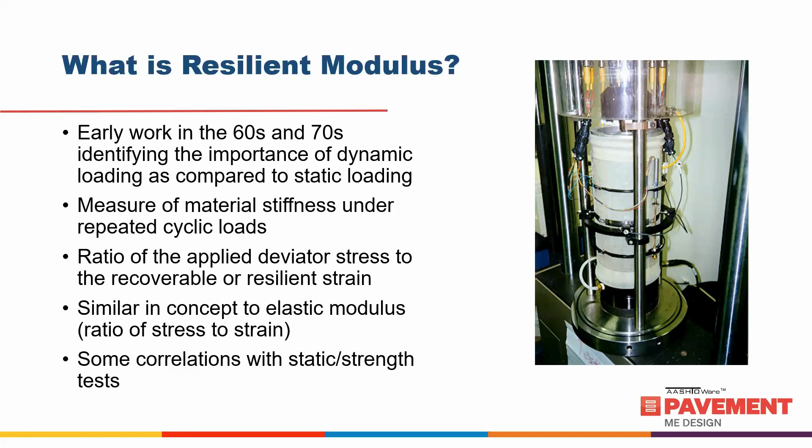I'm not going to go into a lot of detail on that, but resilient modulus testing typically involves a load cell, like I showed in the previous image that you see on the right. There are different sets of apparatus that you can use for this, but this is one example. You apply a load on, you confine your specimen with a confining stress, and then you apply a deviator load.

Typically, the deviator load is a pulse type load, and you load it for a certain duration, a tenth of a second for example, and then you have a rest period. The rest period has changed over time, and different standards call for different rest periods, but you may typically see 9/10 of a second of rest period following that.

So if you repeat this over time, your material, your sample or specimen that you're testing, will have a certain level of strain, and then you remove the load, and some of that is recovered, and then you repeat it. You have a behavior that looks something like this on this chart.

The resilient modulus then is just the recoverable part, and you see that in the case of this soil, there may be a plastic part that essentially gets accumulated over time. But the resilient modulus is this recoverable part, the ratio of this recoverable part to the stress that is applied, that is the deviator stress, the load stress that you're applying. So that's the definition of a resilient modulus.

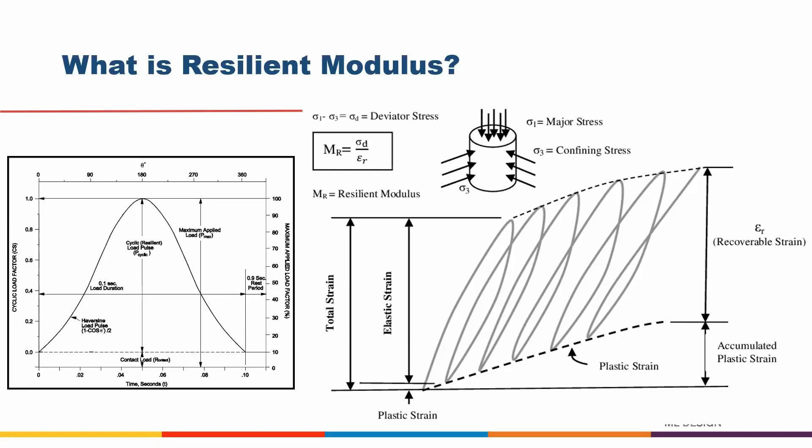As you can see, it is pretty specific, measuring a specific property of that soil under some specific testing conditions. So we always have to keep in mind that there is a testing standard that goes with that, and the testing standard would determine some of the values that you might get.

Why is it so important for us pavement engineers? As early as the 60s, researchers found, and definitely a lot of work was done by pavement engineers in the 70s, that it was a key property for unbound material and a key input for pavement design.

The reason for that is the dynamic aspect of the loading, and the way you can actually simulate field conditions, adding a load and removing a load, better approximates what might happen in the field. Obviously, there's no one way to exactly model what is happening in the field, but we want to characterize a material that, to the best of our ability, can better come close to how it might perform in the field.

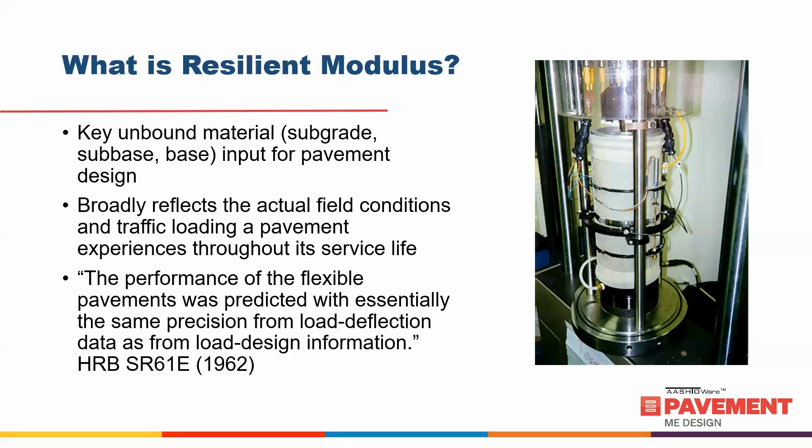I pulled this quote from the AASHTO road test report, the HRB SR State of the Art 61E report from 1962. One interesting thing in this quote was that the performance of flexible pavements was predicted with essentially the same precision from load deflection as from load design information. So very early on, engineers realized that the deflection of a pavement is a good measure of the performance of the pavement, and that's why deflections and the measure of deflection become important in pavement design.

As I mentioned before, resilient modulus is a specific input collected at a specific set of conditions, and there have been standards developed over time. The first standard, the earliest AASHTO standard, was T-274, from 1982. Since then there have been a few other standards, and the most common one we see now is AASHTO T-307, first published in 1999.

The main difference between many of these standards was that in the beginning, in the early 80s and the 70s, resilient modulus testing had some challenges with reproducing results and with the consistency of getting test values. Over time, a lot of research was done on this test, and it became better in terms of specimen preparation, testing protocols, how to measure the deformations, where you measure it, and the stress levels that you use.

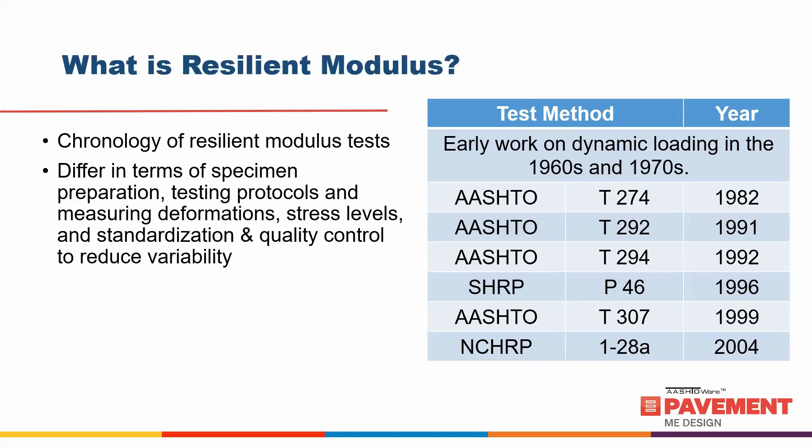So what are some key factors that affect resilient modulus?

I bolded the first two items because they are material related. You may have a certain type of soil or aggregate, coarse or fine, and the type of material and how it behaves under a repeated load is a factor that affects resilient modulus. If you do something to that material, like adding stabilization agents such as cement or lime, that affects the resilient modulus as well. But those are some intrinsic parameters.

But there are some extrinsic parameters that affect resilient modulus as well, and the extrinsic parameters include the stress. Resilient modulus is dependent on the stress level that the sample or soil feels at the time of the test or in field conditions. So what is the stress that it is undergoing?

It changes based on the applied deviator and confining pressures. Resilient modulus is highly sensitive to moisture and density, and those are properties that can change over time depending on how you prepare the specimen. So that impacts resilient modulus.

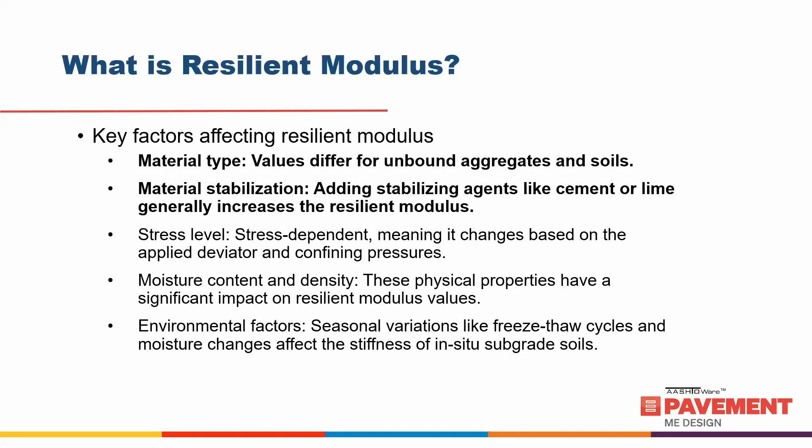And finally, environmental factors. If you have seasonal variations, frozen soil, freeze-thaw cycles, moisture changes - that is the previous bullet - all affect the resilient modulus, particularly of subgrade soil.

Here are some examples of resilient modulus. Some of this I will come back to, but just to give you some idea of how much the resilient modulus changes. On the left is a high plastic clay, and if you look at each one of these, there are three kind of related lines here.

Each one of these is at a different deviator stress that is applied, and as you go from one point to another, each one of these is at a different confining pressure that is applied. As you go from one point to another, you're applying a different load stress to it. So you can see the confining pressure and the deviator stress impacts the resilient modulus.

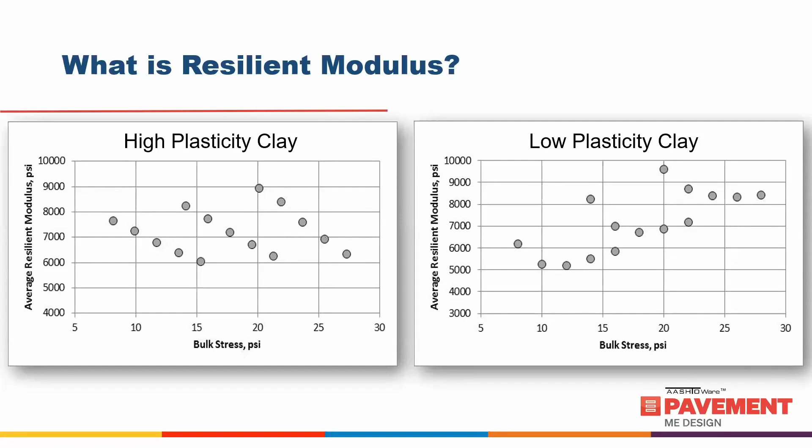In this case, it can be as high as 9,000 and as low as 6,000 for this high plastic clay. For a low plastic clay, it can go from close to 10,000 to 5,000. So there's about 2 to 3 times a factor of difference in terms of resilient modulus in these two examples.

For coarse grain soils and aggregate, you can see in this case the coarse grain soil is somewhat similar to the last slide we saw, and there's a stress-dependent behavior here. That means depending on the stress, you're going to have a different resilient modulus value.

To the right, you can see this aggregate base. It can go from 10,000 up to 45,000, depending. You may not reach as high as 105 bulk stress, but let's say you go to the 65 range, you're still going from 10,000 to about 30,000 in terms of the resilient modulus of that aggregate base.

So the take-home message is resilient modulus is really not one value. It's actually dependent on many different things. If you think about how a pavement structure is, you have the structure where the subgrade soil or base layer is sitting, and you have a load that's applied, so the stresses change because of that load. You're not having one value of resilient modulus technically - you're having many different potential values.

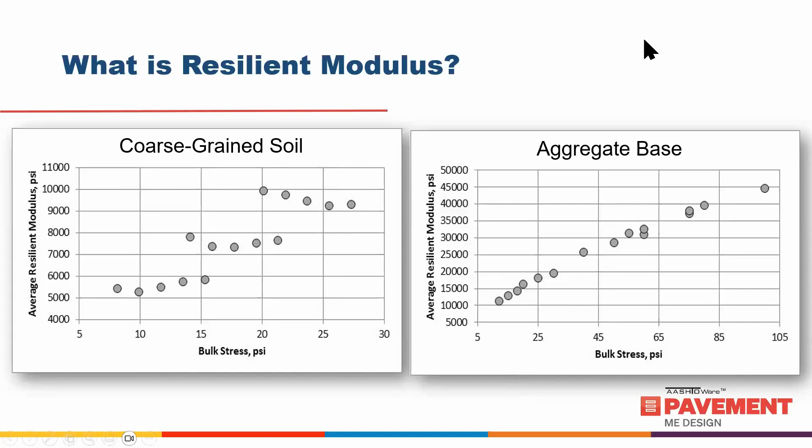So that gives you some background on resilient modulus and testing. I didn't want to go into too much detail on that. There's a lot of people who have done a lot of good, important work in resilient modulus testing and how it impacts performance and so on.

But let me come to what resilient modulus meant for AASHTO 93. If you recall AASHTO 93, the equation, the fundamental equation for AASHTO 93 really came from the AASHTO road test, which was in 1958 to 1960. At the road test, which was done in Ottawa, Illinois, there was one soil type.

That soil type, let me come back to that. The original AASHTO equation, really from the 1966 version, is just this number, 9.36 times log, blah blah blah, until this log number. So this part was the original AASHTO equation.

In 1986, with the 1986 guide, in the 72 guide they added some regional factors, soil factors. But the 1986 guide was the first time resilient modulus came about in the AASHTO road test, in the AASHTO guide. That's this last two terms, the 2.32 times log resilient modulus minus 8.07. And then in the 93 guide, in the 86 guide, they also added this reliability portion, that's the first two terms.

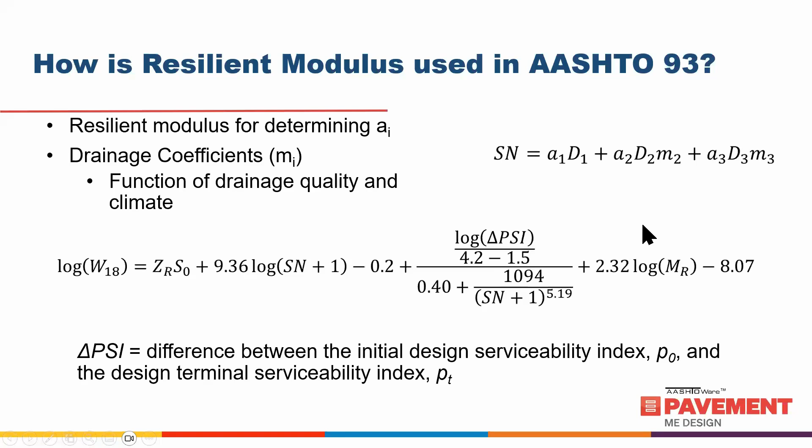I want to talk a little bit about sensitivity, just this one slide. If you use the AASHTO equation, and for example, let's say you are off in the computation of the resilient modulus and you use a 10,000 resilient modulus versus a 15,000 resilient modulus...

So between 10,000 and 15,000, it's about half a structural number. I'd say that's equivalent to about one, maybe a little more than 1 inch of asphalt. And then between 10,000 and 20,000, it's about a structural number of maybe about 1 or so. So again, that's about 2 inches of asphalt.

So if you're off by 2 or 3,000 in resilient modulus, you could be off by about half an inch of asphalt in your model for computing the structural number and then the thickness of asphalt that's required. Keep that in mind, because I'm going to talk about this when we look at the PMED sensitivity as well.

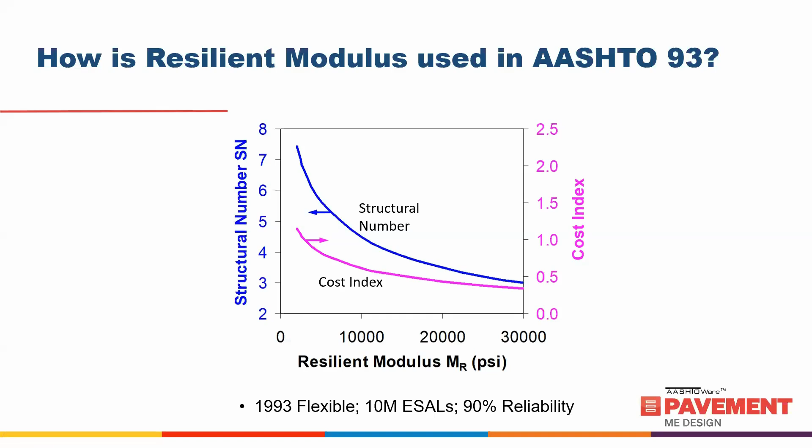So how is resilient modulus used in the AASHTO 93 guide? It's only used for flexible pavements. Starting with the 86 guide, the AASHO Road Test resilient modulus was 3000 psi.

AASHTO, and clearly at that time they used that model that was used in the 86 guide, which was the AASHTO T274 test. I'm presuming it's the average in situ estimated value, the 3000 psi.

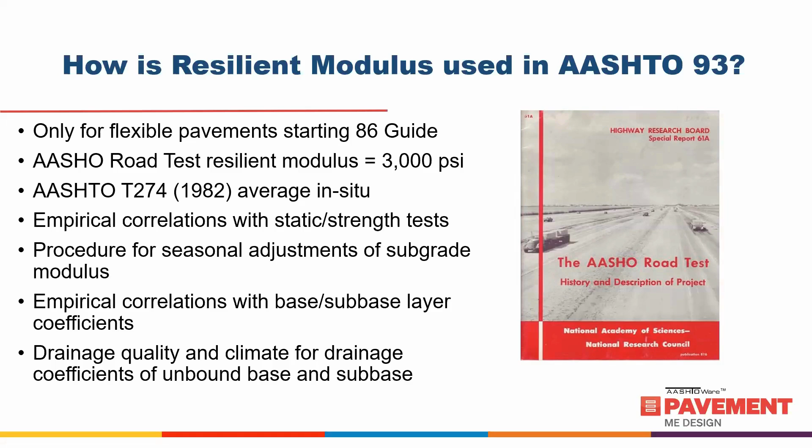The AASHTO guide also provided a lot of empirical correlations with static and strength tests. As I mentioned earlier, there's a procedure for seasonal adjustment of subgrade modulus, some empirical correlations with base and sub-base layer coefficients, and then drainage quality and climate drainage coefficients are used for the unbound base and subbase to account for moisture in those layers.

Just one last slide on the 93 guide before we move on to Pavement ME Design. The 93 guide had some quotes like: resilient modulus should normally be based on the properties of the compacted layer. So they understood that in situ compaction was important. It's based on average resilient modulus values, and it emphasized that you should not select a design resilient modulus value based on some minimum or conservative criteria—use an average value.

There is some mention of stress states in the AASHTO 93 guide, but not a whole lot, and I don't think there was any kind of adjustment made for stress states in the AASHTO 93 guide. In fact, I'm guessing most agencies and most designers probably use the same resilient modulus values regardless of whether they're building a thin or thick pavement, whether the structure above the subgrade is substantial or not. There was some understanding that stress states impact resilient modulus, but most agencies probably did not adjust the resilient modulus depending on the stress state.

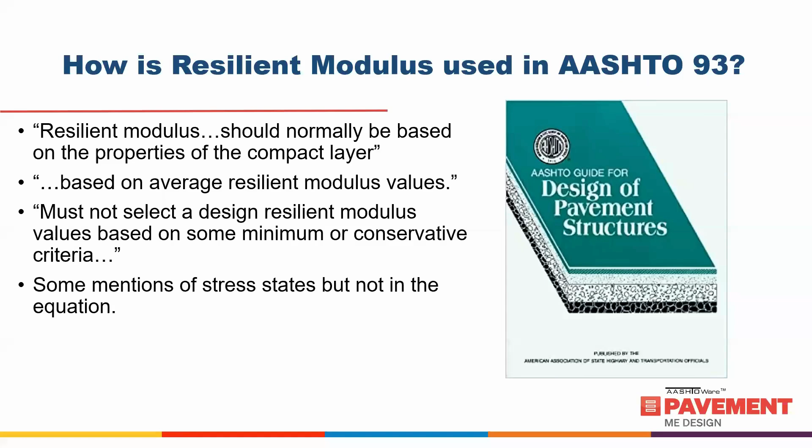I'm mentioning some of these now because as we talk about PMED, you start understanding some of the differences and what we can do with Pavement ME Design going forward. So for the next 15-20 minutes or so, I'll talk about how resilient modulus is used in Pavement ME Design.

If you look at resilient modulus input in Pavement ME Design, it allows you to select level 2 or level 3—there's no option to select level 1 for resilient modulus. You have two options: one is to let the software modify the resilient modulus based on the temperature and moisture in the pavement layers, and the other is for a user to enter some annual representative value to use as the resilient modulus.

In level 2, the idea is you can use correlations of the material you're going to have on the project. You would do some lab testing on the soil for that project and use correlations with CBR or R-value, and the software has some correlational equations in there that you can use as your resilient modulus. This is for the soil, base, or subbase that you might encounter or use on that project.

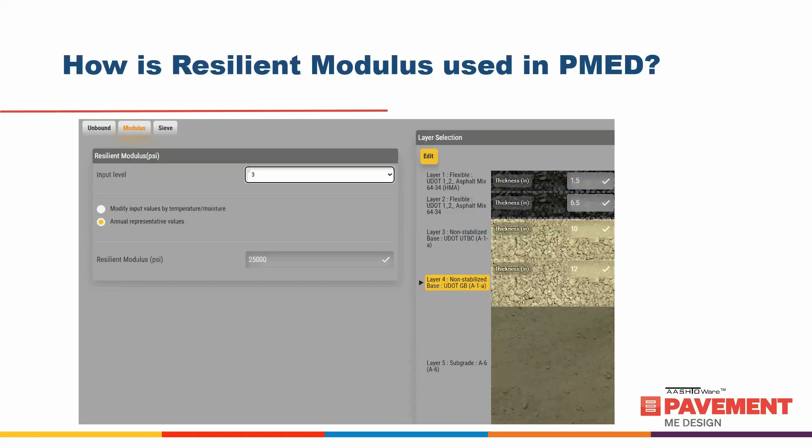At level 3, you would essentially just use some default value—a regional default value, a state default value, or maybe even the PMED-provided default value for the resilient modulus. So that's how the software is currently set up.

This slide summarizes that there is no level 1 right now in Pavement ME Design, because the original MEPDG models suggested that level 1 really should be a nonlinear stress-dependent resilient modulus parameter—K1, K2, K3—and it also requires the use of nonlinear finite element code, which is not currently in Pavement ME Design. Ideally, if you really want to characterize unbound materials, you need to do a nonlinear stress-dependent analysis of those materials and model that appropriately.

So level 2 and level 3, where you specify the resilient modulus directly, through empirical relationships with other index properties, or use a default value, has no stress dependence—it's essentially an individual value. I put a question mark on 'no stress dependence' because as we go forward, I'm going to talk about how you can bring in some level of stress dependence into the model.

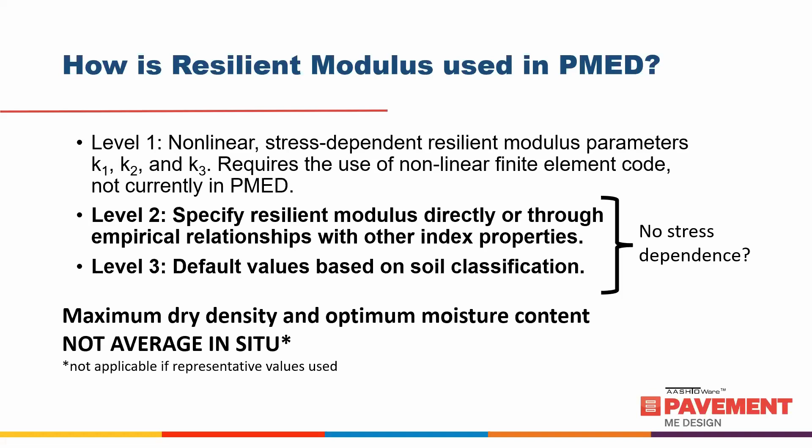I'll explain some of that in the next few slides. So essentially, if you go back to some soils engineering classes, when you take a soil and compact it at the optimum moisture content, that's where you can achieve the maximum dry density for a given compactive effort. These two curves you see here are two different compactive efforts, but at a given compactive effort, you can achieve a certain peak density at that optimum moisture content.

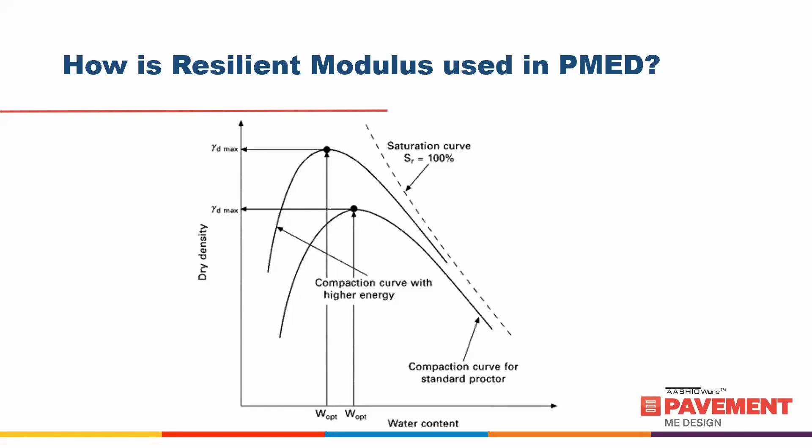The reason you enter the resilient modulus at the optimum moisture content and maximum dry density is because when you do a Pavement ME design—and I'm talking right now about new construction—you have a base construction date, a pavement construction date, and the traffic open date. The base construction date is when the moisture model starts. There's an assumption that the contractor does certain things in constructing the base, and once that base is constructed, the moisture model built into Pavement ME starts moving moisture from the groundwater table and the soil water characteristic curve through the pavement layers.

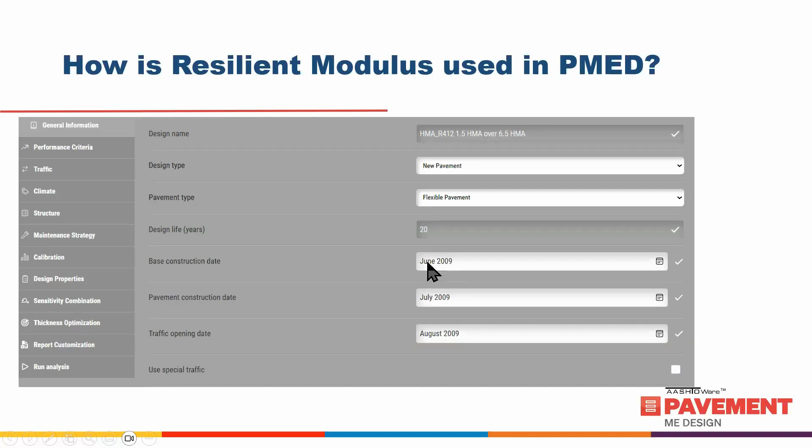So, for example, if you have a 20-year design, the design is really from August 2009 to August 2029, but the moisture model actually starts in June 2009 and then carries that on till August 2029.

So the reason when the MEPDG was developed they did not use in situ values, but rather used the optimum moisture content and maximum dry density, is there's a couple of important reasons. One is purposes of calibration, because the majority of resilient modulus tests are typically performed on specimens at optimum conditions. So for building databases and for calibration considerations, the resilient modulus at optimum conditions is used in MEPDG.

The original MEPDG documents also say that common practice is to require contractors to compact base to at least 95% of maximum dry density and subgrade to 95% of maximum dry density using the modified or standard Proctor. The thinking was that a contractor will typically target above these minimum requirements, and in order to compact to these levels, they probably want to get the moisture at the optimum moisture content to basically achieve those densities. So good construction practices will force contractors to wet the material to near optimum to facilitate compaction, meaning the base will be close to maximum dry density and optimum moisture content when constructed.

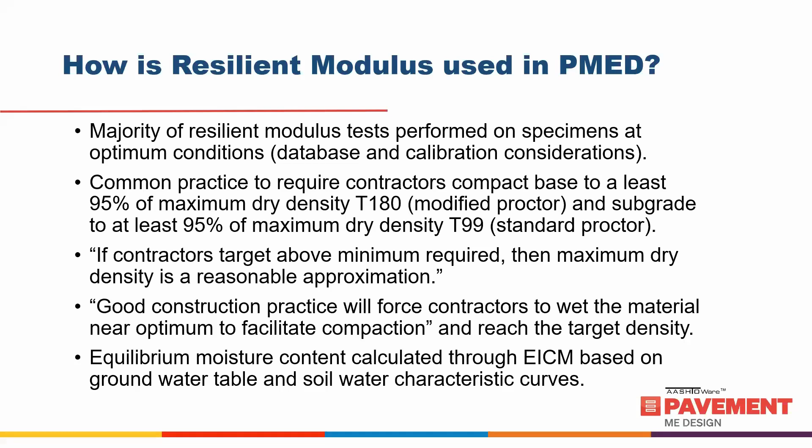So let's look at the sensitivity of resilient modulus in Pavement ME design. Here are a couple of examples. Anytime I give this kind of example, I always want to put the caveat that this is one set of data for one specific set of conditions and one set of inputs, and cannot really be generalized to a full broad range of inputs. But here are a couple of examples.

The chart on the left shows a resilient modulus range from 8 to 22. You can see the HMA thickness in this condition—around a modulus of 10, it's about 7.5, and if you go to about 20, it's about 6.5. So about a 1-inch difference in HMA thickness. More likely than not, you may be off in your resilient modulus by only maybe 2, 3, 4, 5,000 psi. If that's the case, your difference—say from 12,000 to 16,000—is maybe about a quarter of an inch, maybe a little bit more in this case.

It's often useful to do a sensitivity analysis to see whether you really need that level of sensitivity in a certain parameter. I'm not saying you do or don't, because it depends on the other inputs, but it's always valuable to do a sensitivity analysis and see how something impacts your layer thicknesses and designs.

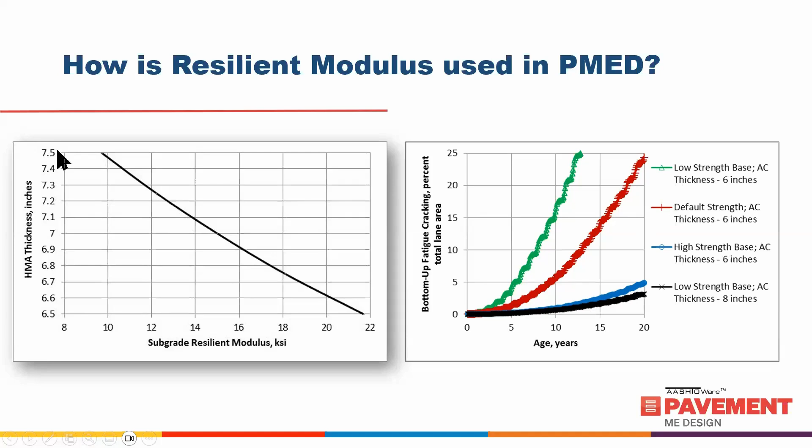But if you increase that thickness from 6 inches to 8 inches, you can see that 2-inch difference in thickness kind of made up for that base. So you could use a low strength base, which is the green line, and add 2 inches of AC and you're now at this black line. But if you keep the same thickness of AC, 6 inches, you go from the green line to the blue line if you have a high strength base versus a low strength base. So that's a different way of looking at sensitivity in terms of cracking, in terms of HMA thickness.

So let me pivot a little bit from those inputs and talk more about the stress sensitivity of resilient modulus and how we can use that in Pavement ME Design.

There's a new standard that should be out soon. It has been balloted, and this is a standard practice for determination of the design resilient modulus for unbound layers for pavement design. This gets us to a quasi level 1 resilient modulus. A true level 1 really means you have to model the stress sensitivity—you might have to do finite element modeling of the structure—but we can include a stress sensitivity in the resilient modulus value that we enter.

Resilient modulus is impacted by the test conditions—maximum dry density, moisture content. But now we're also bringing in the stress state that the soil, base, or unbound material encounters while it is in situ. So this standard gives you a way of accounting for the stress state and using a resilient modulus value based on that stress state.

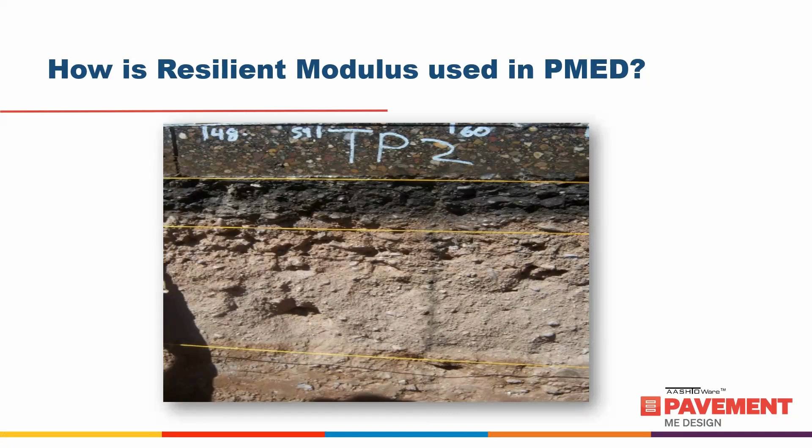So if you think about soil structure—I'm going to focus primarily on asphalt pavements, but this discussion is somewhat true even for concrete pavements—you have your asphalt layer, your base, and then your subgrade. Because of all these layers, these unbound materials are at a different stress state than if they were just loose materials, and so we have to account for this stress state.

Here's one example, from the standard itself: resilient modulus testing allows you to have a confining pressure. So if you have a confining pressure of 6 psi, 4 psi, and 2 psi, and then you add the deviator load - the load that you apply and release in a cyclic manner of 2, 4, 6, 8, and 10 psi at each of these three levels - you can combine those numbers to get a bulk stress, which is essentially 3 times the confining pressure plus the deviator stress. So 3 times 6 plus 2 is 20.

That'll give you a bulk stress, so at different bulk stress values, you have a resilient modulus value. One thing to note is that the modulus values can change depending on the confining pressure for this particular soil. As the deviator stress increases, the modulus values decrease. And as the confining pressure goes from 6 to 4 to 2, you can see that the higher the confining pressure, the higher the resilient modulus.

So this is typical behavior of a silty, clayey type soil - when you confine it, it often has higher modulus values.

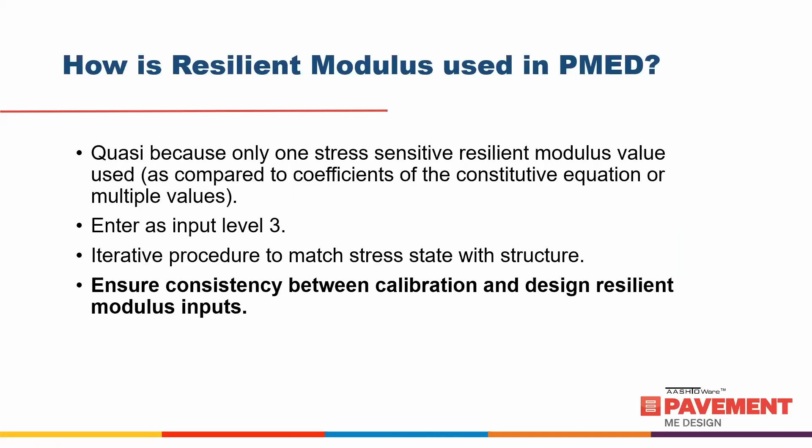So in Pavement ME design, in order to follow this standard practice that I mentioned, what you want to do is start with the laboratory testing. You test the material at different confining pressures and at different deviator stresses, and then use this data to develop a constitutive model.

Now in cases of some soils, you could have a simpler equation. For example, if you have a granular soil, you could just have K1 times theta to the power K2, and that will give you a model as well. So there are a few different functional forms that you could use.

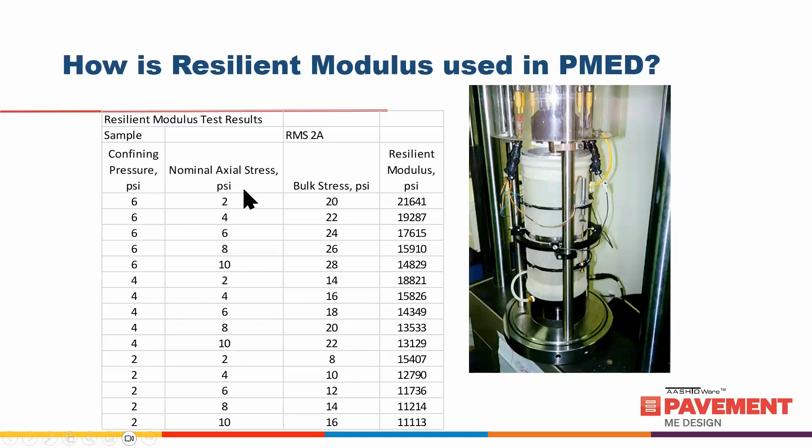So you start by developing that, and the reason becomes clearer when we get to picking the right resilient modulus values - we could potentially just eyeball it from these numbers, but we're engineers, so we don't want to just eyeball numbers. You come up with these equations based on the data you have.

Harold Von Quintus and some of his colleagues have done this work for decades, and in the late 1990s, I think 97 or 98, they published some work on back calculation and resilient modulus - how to use back calculation modulus values, and how they relate to the laboratory resilient modulus values.

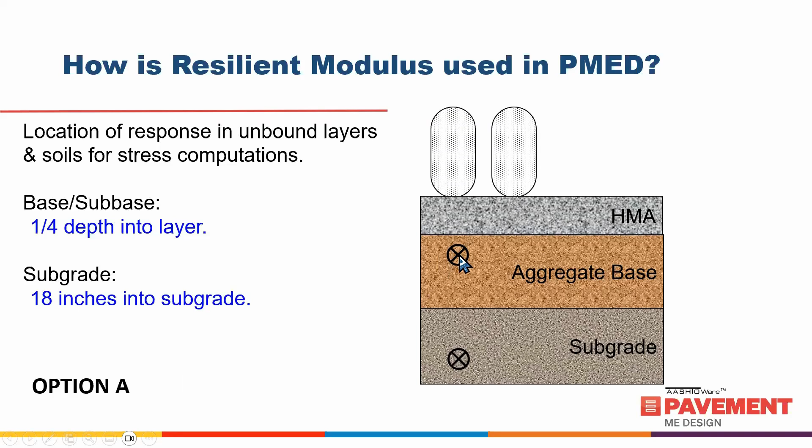Based on those reports, they came up with a location for calculating your stresses, strains and responses. For base and sub-base layers, you go to a quarter of the depth of the layer, and in the subgrade, you go 18 inches into the subgrade. I have option A here, and you'll see this in some of the coming slides because there's another slightly different way we could go about this, but I'm going to start with this option.

So this is a kind of busy chart, and I'll try to explain it the best I can. What we are trying to do is simulate - let's just focus on the subgrade for now, and then what we talk about for the base is kind of similar.

If you take a point in the subgrade, in the lab you have the stresses - basically your confining stress, which would be the same in all directions - and then you add your deviator stress to that, which is the load you add. So you may have a point in the sample with certain stresses, and then a deviator load that is applied.

In the field, it's a little bit different. In the field, you now have the overburden, that is essentially the weight of the material that's above it. And that's the stress that's in that direction. And then you have the stresses in the horizontal direction.

Keep in mind, this point is in equilibrium. So you have the stresses in the horizontal direction. That is basically what is confining or holding this point in space and keeping it from moving. And that confinement is related to this overburden. So let's talk about this without bringing in the wheel load at this point in time. You have that point in space, and it's being confined in this direction. There's usually a relationship between this overburden and this confinement.

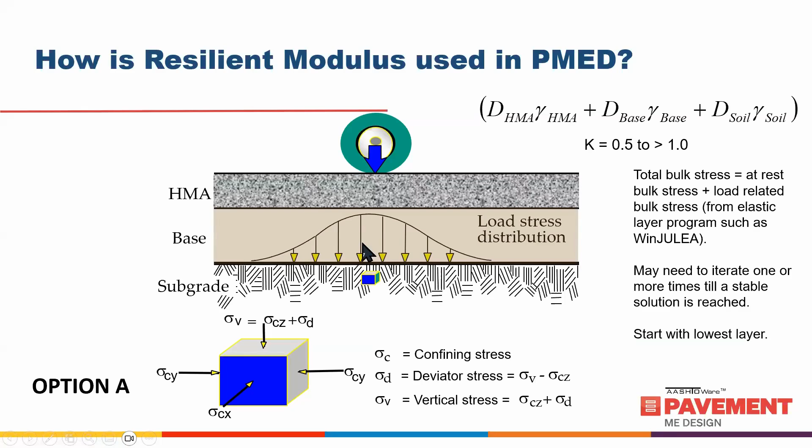So the guidance is to start with the lowest layer, that's your subgrade, and then do your base layers. Okay, so what do we want to do? Here's an example of this, and there's a few examples in that standard. Once we're done, you should probably, if you have a chance, once the standard becomes official, review that standard. But here's an example.

In this example, you have a sandy soil. Under 2, 4, and 6 confinement, these are the curves. But if you develop the constitutive model, at just 2.71 psi, that becomes this dashed line. Then you do your WinJULEA computation, which gives you a bulk stress of 10 psi in this case. Where that point intersects, that would be the resilient modulus value you would need to use for design. In this case, it's 16,000 psi.

So you can see that for this soil, the resilient modulus goes from 8,000 to 18,000, but under the conditions that these computations were made—this is one specific example with one specific structure and one specific soil—16,000 would be the proper resilient modulus to use.

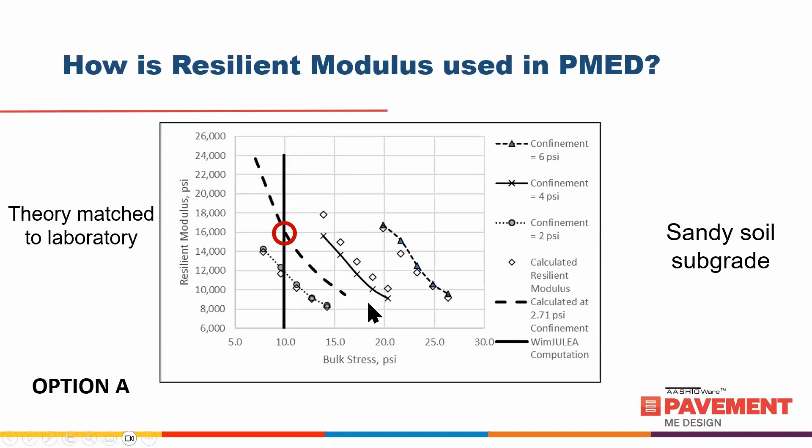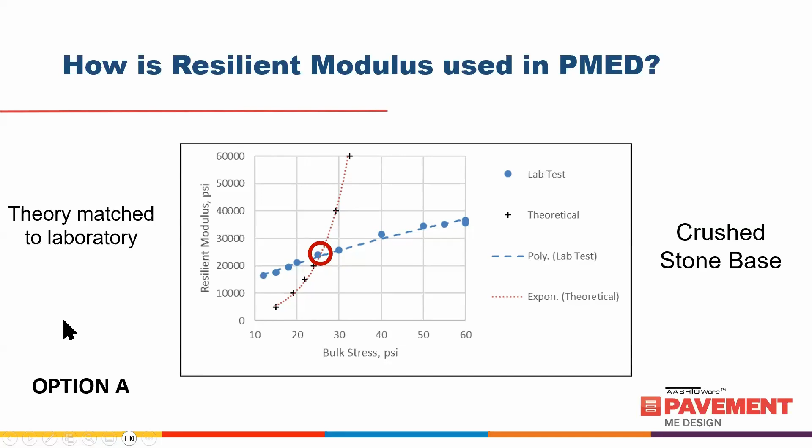In this case, this equation is just bulk stress, because there's a difference between the constitutive model form for this one versus the other. So it's just the bulk stress model here. This is the point where it intersects, and that would be the resilient modulus value you would use—about 23,000 psi, as opposed to 38,000 or even 16,000. So that's the resilient modulus value to use for that layer.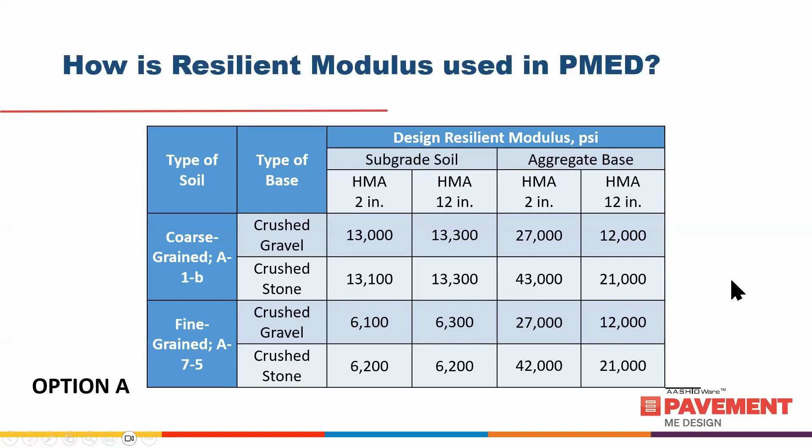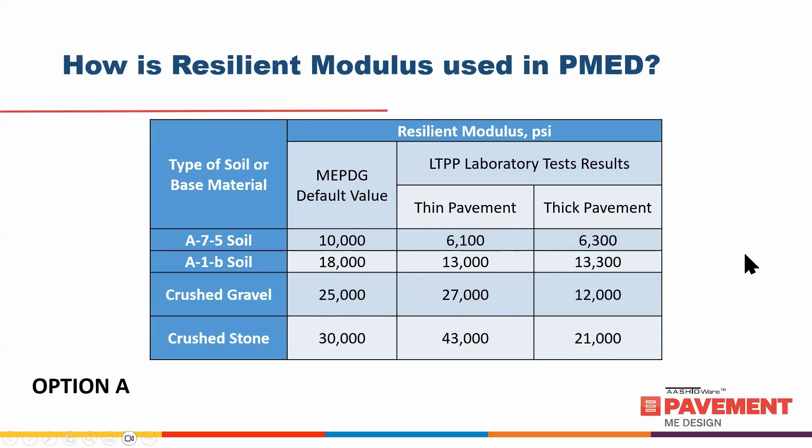Here's another example, from the LTPP lab—LTPP sections for different soils. The MEPDG default value is shown here, and then the lab results for thin pavement versus thick pavement, so it can be different than the default value. I'm going to talk about default values in a little bit, but the values you would need to use can differ from the default resilient modulus values.

So I'm going to have a couple of slides on option B, which is less detailed than option A that I just showed. You could just say, you know what, I'm not going to do this—I don't want to run WinJULEA, and I don't want to do this, that, or the other. You can just go to these tables.

You can say that if my structure falls between these ranges—12 to 24, 24 to 32, greater than 32—I'm going to use the confining pressure shown here, and then the bulk stress shown here, depending on whether I have a rigid pavement, a thin flexible pavement less than 9 inches, or a flexible pavement greater than 9 inches. So you can take these points, go to your charts or constitutive equations, and just use the resilient modulus values you get from these tables.

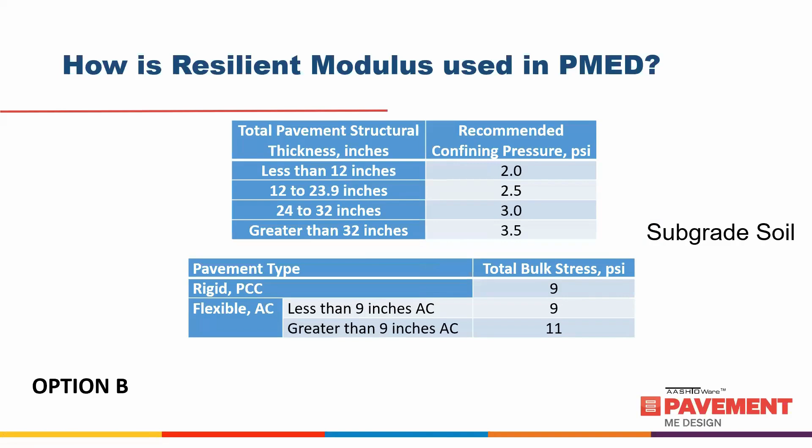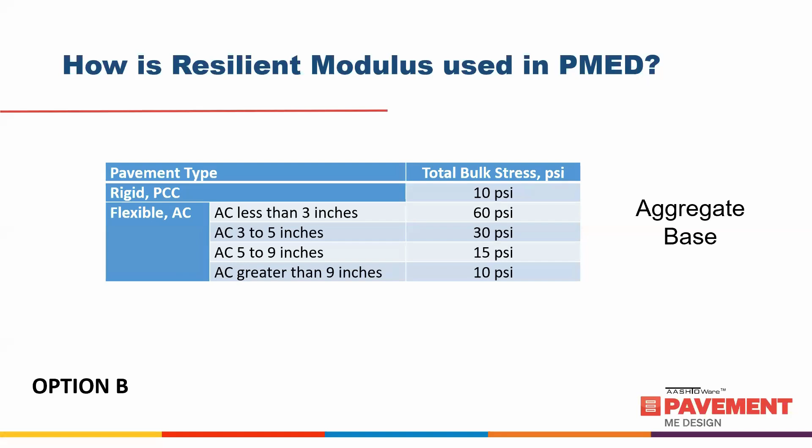So this is for your subgrade, and then for your aggregate base, something similar. You can just go to your constitutive equation or your resilient modulus test directly, then look at this table and pick up the bulk stress, and look at what the resilient modulus is at that bulk stress. So if you choose option B, you don't have to do the response computations using WinJULEA.

Let me talk a little bit about default resilient modulus values. There's a small error in the manual of practice that I wanted to point out, but I'm going to start in the rightmost column of this table. You have your soil types, A1A through A7-6, and in the original MEPDG, from the late 90s, early 2000s when it came out, you have 40,000, 38,000, 29,000, 32,000, and so on for the resilient modulus values.

Harold, Witczak, and others did some work under 1-40D where they looked at resilient modulus values, and I think Claudia Zapata was also part of that team. They looked at resilient modulus values for LTPP sections and found mean values of 29,650 and others for different soils in the database. These are adjusted for maximum dry density and optimum moisture content, and adjusted for the back calculation part, which I'll get to shortly. Based on that, they recommended 29,500, 26,500, 24,500, 21,500, 21,000, 20,500, 16,500, and so on.

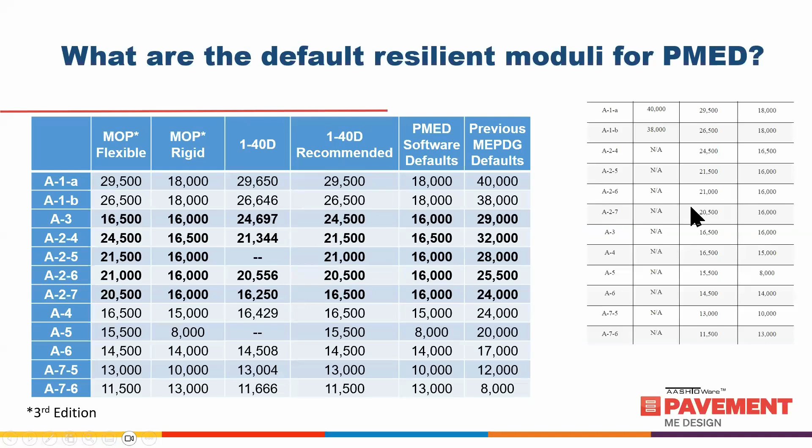So the MOP has these numbers off by a little bit. If you want to correct the MOP, you would say that A3 is 24,500, A24 is 21,500, A25 is 21,000, A26 is 20,500, A27 is 16,500. So that would be the correction to be made.

So I'm going to wrap this presentation up in the next 5 minutes and talk about back calculation. When you do back calculation, what you're really computing is not a resilient modulus, and it's not an elastic modulus. As I mentioned, elastic modulus is really a static measure, and resilient modulus is really a specific lab measure based on specific lab conditions.

When you drop a load, you're in a dynamic situation because you're dropping a load and the pavement responses are at the surface of the pavement. As you can see in this schematic, the deflections at the surface of the pavement are a response to that dynamic load that you just dropped. And because it is a response on the surface to a dropped dynamic load, here's an animation for you.

A drop dynamic load really is not an elastic modulus per se, but it's not a resilient modulus either, because you're not really measuring right under that load. You're interpolating, or technically back calculating, based on these deflections, and there's a lag time it takes for these sensors to get the responses based on the drop load.

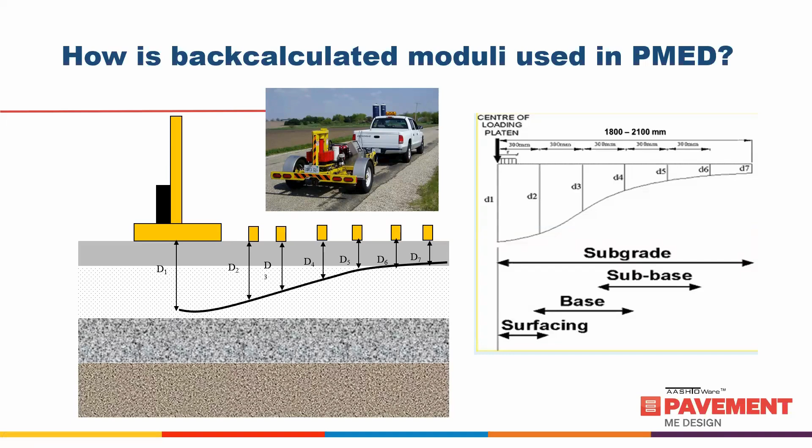There are other factors why this drop load and then the back calculation procedure results do not directly match a resilient modulus value. So when you use a back calculated modulus value, it's technically not a resilient modulus. It is a back calculated modulus.

So you have to tie that into a resilient modulus, and in order to do that, you multiply it by a C factor. This C factor is an example here for different conditions, different locations, depending on PCC or AC or embankment, and then aggregate base and subbase versus subgrade. So you back calculate a modulus, and then you multiply it by this correction factor, and that is the value you use as a resilient modulus value in Pavement ME design.

Note that at this point we are less concerned about the maximum dry density and optimum moisture content, because we're now in a back calculation. We're now in a rehabilitation scenario, and what you're back calculating is already an in situ value. The model will start at this point when you run the Pavement ME design.

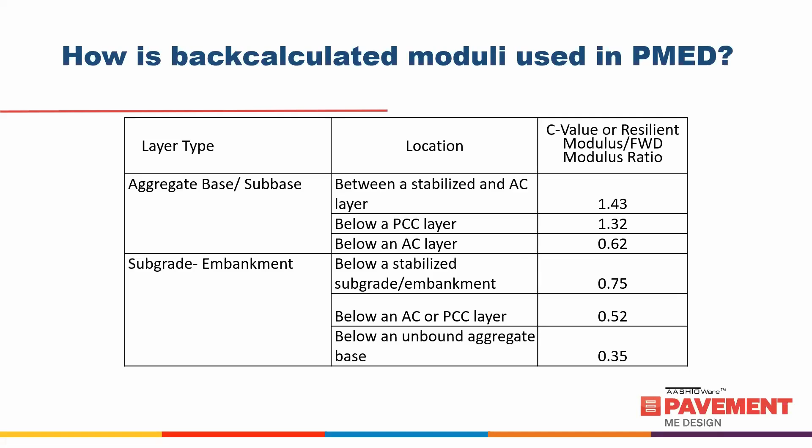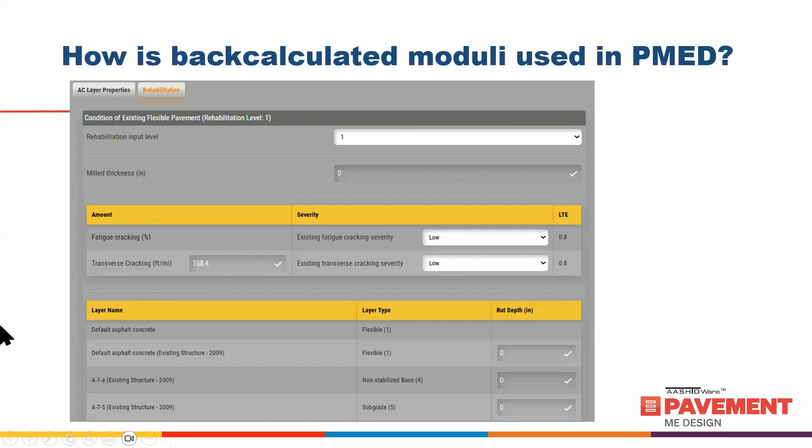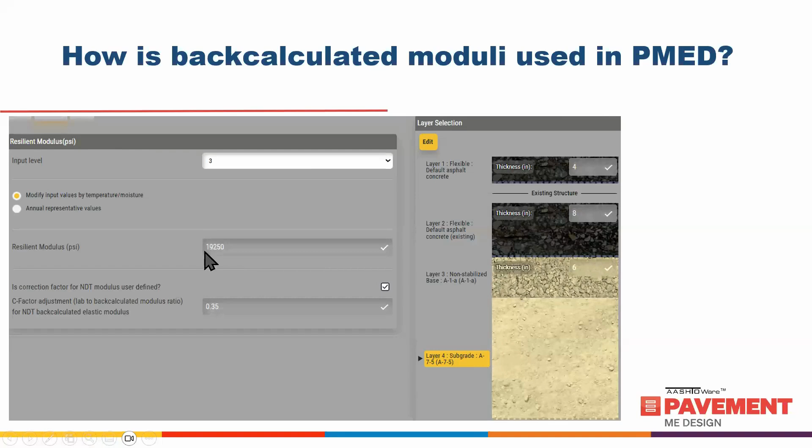So with a couple more slides I'll wrap this up. If you choose rehabilitation level 1 in pavement design, when you go to the layer properties and the rehabilitation tab, you choose rehabilitation level 1. Then within your layer properties, specifically if you select the unbound layers, in this case the subgrade I believe I chose, you can see the C factor, and you enter in the C factor to multiply the resilient modulus, to adjust that back calculated resilient modulus value to a lab resilient modulus value.

So we covered a lot of things in today's presentation, and the key thing I want to summarize is that resilient modulus is an important input, and it's necessary to characterize unbound materials. Depending on the values you choose, it can make quite a difference on the distresses modeled, but at the very least, an inch or two of asphalt thickness, maybe half an inch depending on how off you are, the resilient modulus can impact your design thicknesses.

There are differences in use between AASHTO 93 and Pavement ME design. The key difference being AASHTO 93 really is an in situ modulus, and Pavement ME design is a maximum dry density, optimum moisture content modulus value. But there are other differences too—AASHTO 93 used a different test standard than the PMED standard, the T-274 versus the T-307.

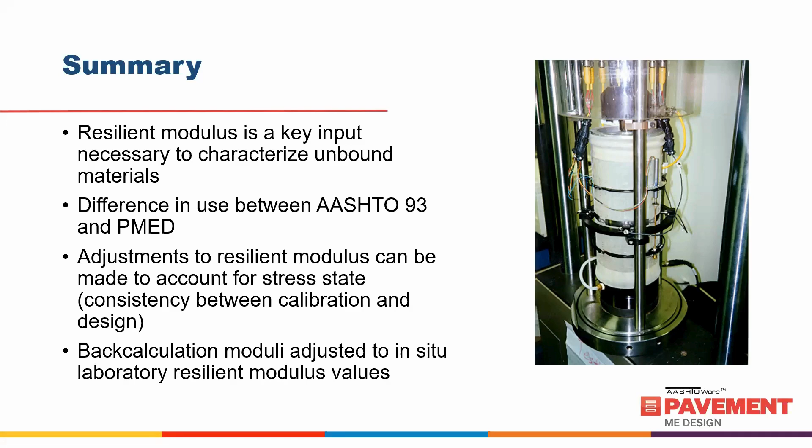We talked about how you can adjust the resilient modulus to account for stress state, but as I mentioned before, I'll say this over and over again: you want to be consistent. Make sure you have the same modulus values and the same procedures for calibration that you use for design. And when it comes to back calculation, you have to adjust to the in situ lab resilient modulus values through the C factor. That is the end of the presentation.